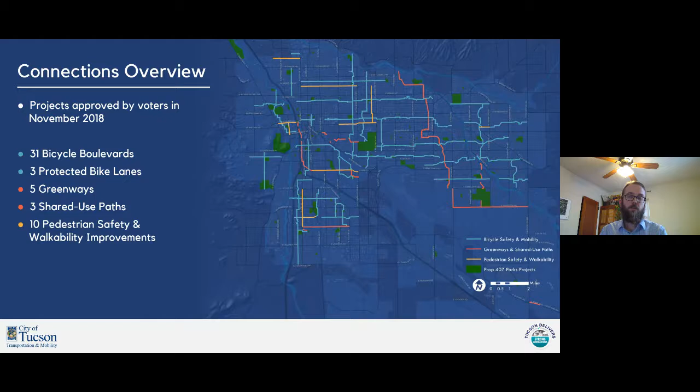Those are projects that improve residential streets for people walking and biking. And we've got them all over the city, and they cover about 102 miles. So we're really starting to fill out a network that'll allow people to ride cross town on low stress, calm, mostly residential streets.

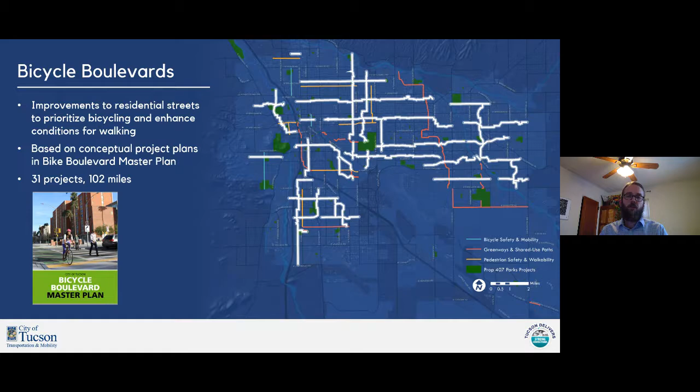So just a quick overview of bike boulevards. As I mentioned, they're typically on residential streets, though not always. They typically use traffic calming, things like traffic circles, speed humps, and chicanes to slow down cars to make for a better walking and biking environment.

And they also use enhanced crossings to help people walking and biking to get across major streets. When you've got a 4 or 6 lane road, it can be really difficult to find a break in traffic. So that's one of the big pieces of bike boulevards as well.

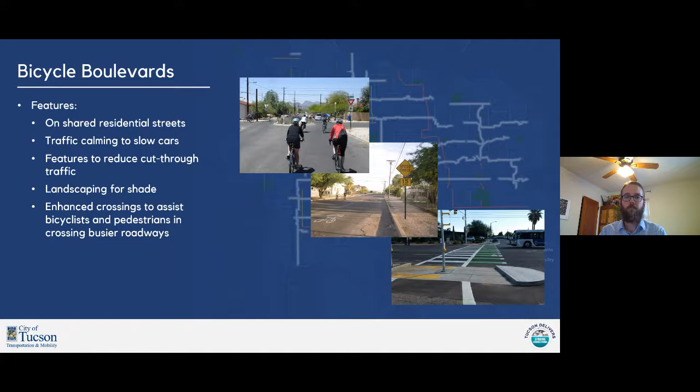So why do we build bike boulevards? Well, we've already got a lot of bike lanes in the city. I think in the region we've got close to 1,000 miles of bike lanes and other bikeways. But a lot of those are designed for what we call the strong and fearless population.

So there have been studies on the types of bicyclists that are out there, people's comfort level with riding. 1% or less are what we call strong and fearless. They're really willing to bike anywhere, any kind of facility. 7% or so are enthused and confident, and those are people who, if you give them a bike lane on a moderate street, most of them are comfortable with that. It's the 60% that are interested but concerned that we're really targeting now.

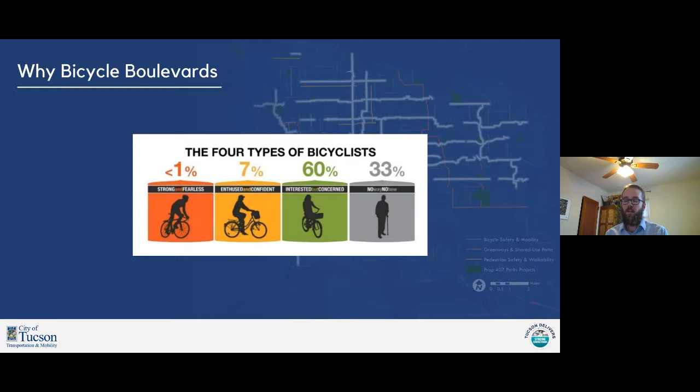What we've seen in a lot of other cities is that when you provide high quality bike facilities that are low stress, that don't put cars and bikes in competition with each other, and you give people destinations to get to, you really see a lot more people riding. So that's really who we're targeting with bike boulevards.

And we've studied some of the bike boulevards that we've already implemented, and we've seen increase in ridership. We've seen really good safety records, and we've seen traffic calming be effective in terms of slowing down cars and reducing the number of cars on those streets.

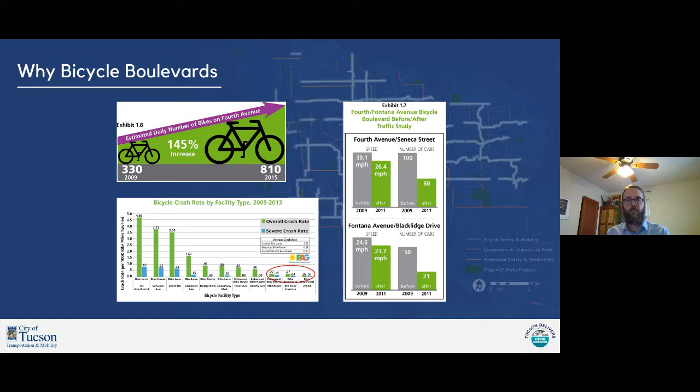So getting back to that interested but concerned population, when you're designing for interested but concerned, you need to be mindful of the roadway design, and specifically, you can't have car traffic that's too fast, and you really can't have more than 1,000 or 2,000 vehicles per day if you're going to have cars and bikes operating in the same space. That can work fine on a really low volume residential street, but when you start to see more car traffic, there really needs to be separation, and so that would take the form of a bike lane, generally either buffered or protected in some way.

So just a quick recap, we did a bunch of outreach last fall on this project, as well as the Treat Avenue Bike Boulevard. We did a total of 7 public meetings. We reached out to neighborhood associations and presented to a few of them when they requested that. Excuse me. And we spoke to and got surveys from hundreds of people at these events and online.

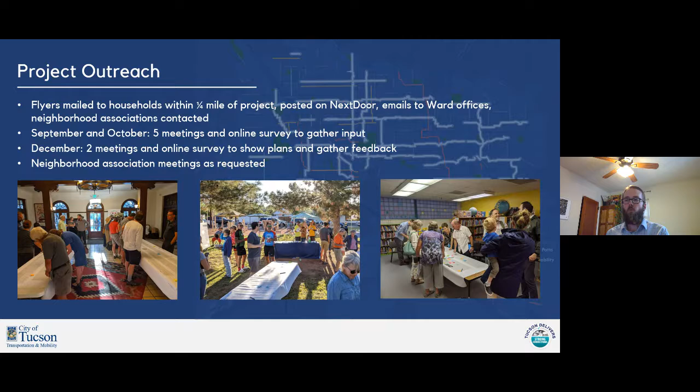And we got a lot of really good input, much of which we were able to incorporate into the designs of the projects, or that confirmed what we were planning was on target with what people wanted to see.

I apologize. So right now we see about 3,000 vehicles per day on this segment, and the 85th percentile speed that we've measured is 29 miles per hour. And all that means is that 85% of the vehicles driving down that street are going 29 miles an hour or slower, and the other 15% are going faster. And that's really just a figure that's used when analyzing the performance on roadways.

So both of those figures exceed what national bodies recommend for shared lanes. So we really want to look at other options to make these comfortable, low stress options here for people biking. So we're looking at two options really for the general roadway cross section between Stone and 4th Avenue. Right now we're looking at Stone to Herbert, because between Herbert and 4th is a little different.

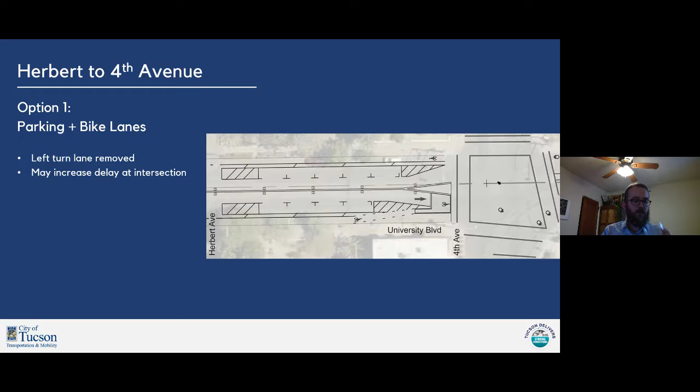Then the other decision point here is from Herbert to 4th Avenue: do we want to keep the bike lane, keep parking, and remove the left turn lane, and potentially create a little additional delay at the intersection? Or do we want to keep the left turn lane, keep the bike lanes, and remove the parking? So those are the options we're considering. Those are what we're gathering feedback on in the survey, and we definitely want to hear what people's preferences are there.

Mike asks, is there a reason why the parking lane is 9 feet in one option and 7 feet in the other? 9 feet seems really big. That's a good question. There is a reason for that, yeah. The reason is that people do use these parking lanes as parking for their house. A lot of times people don't have off-street parking. We've heard from people that when they're getting in and out of their car, when they're loading their kids in their car, they don't want cars rushing by too fast.

So we made a conscious choice for the protected bike lane option, where the parking is right next to the vehicle lane, to make that lane wider. Most cars are around 6 feet in width, so if you park all the way to the right, you've got 3 feet, which is plenty of room to get around the car and stay out of the travel lane. Whereas the other option with the buffered bike lane, we've got a 7-foot parking lane, a 3-foot buffer next to that, then the bike lane. So you've effectively got a 10-foot lane in that option. So in both cases, we're really just trying to make sure we are providing enough space for people to get in and out of their cars safely.

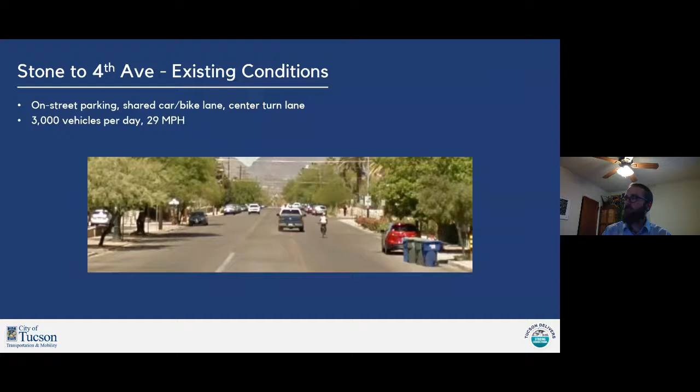But with 3,000 vehicles per day and 29 miles per hour, that's really above these types of guidelines for the types of riders that we're trying to reach. So that's why we're exploring this option for this area in particular, because it is higher vehicle volumes and higher speeds.

Our next question is, 4th Ave and University floods during almost any rain. Exit from vehicles requires getting out on the curb or walking through 8 to 12 inches of water. Will the flooding issues be addressed? Unfortunately, no. We're not doing any drainage improvements as part of this project. That's not really in the scope or the budget of this type of a project.

Which bike lane proposal is safer for cyclists? So, both options are safe. Both of them are in the realm of what is recommended for this type of facility. So I don't want to say that one is necessarily safer than another, but when you create that separate space for bicyclists, you're gonna create a higher comfort area. And certainly, if you're putting bicyclists behind parked cars, there's that physical protection there that you don't get with striped lines.

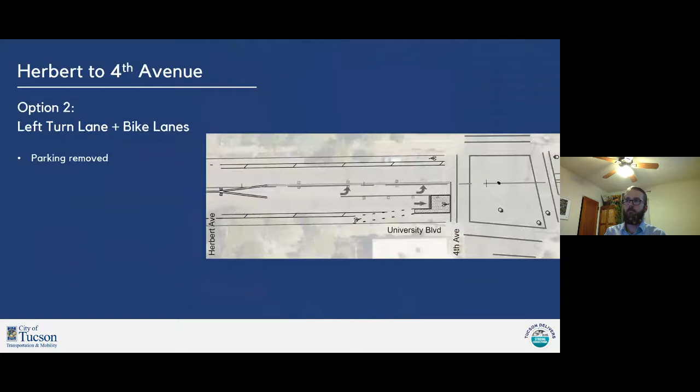Our next question is, University at 6th Ave, flexible bollards were installed to create a protected space at the intersection corners. They also enforced squared turns, which are safer, and they precluded parking too close to the corners. Within days, the flexible poles began disappearing. Who removed them were the adjacent residents who were miffed that their parking had become less convenient and less prolific. How will you deal with this going forward? I have been disappointed by the lack of enforcement regarding the destruction of roadway infrastructure, especially cycling infrastructure.

So certainly, that was a neighborhood initiated project. I'm afraid that I'm not too familiar with any agreements as far as maintenance goes there. Certainly, if we go with the protected bike lane option, we will be proactive about repairing or replacing any flexible posts that are damaged or removed. Unfortunately people are going to run into them sometimes. If you have disgruntled neighbors, that could be an issue. But we'll do our best to make sure that it's maintained, if that's the option we go with.

We have one comment from an anonymous constituent. Bikes between parked cars and curb. Really difficult to navigate intersections on a bike or make left turns. It's great downtown by the courthouse because it's basically just one block.

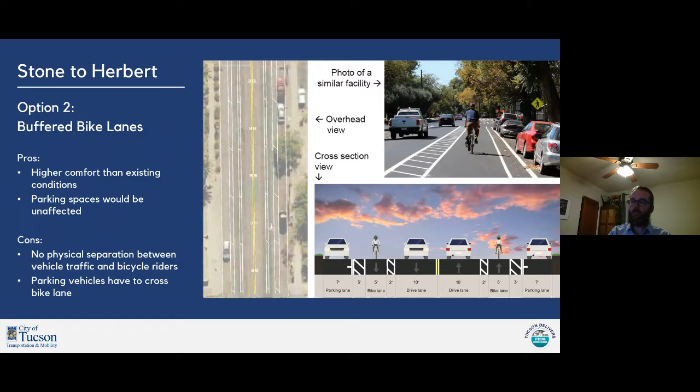We did get a question from a constituent asking, will the bike lane only exist on one side of the street, east-west direction? And Andy replied, the bike lanes would be located on both sides of the street. And then I'll pull up the visual as well, just to show. So you can see the bottom right-hand picture, that cross-section that shows the different lanes. It shows that bikes would be going the same direction as cars on the same side of the street. And that would be the case whether it's the protected bike lane option or the buffered option.

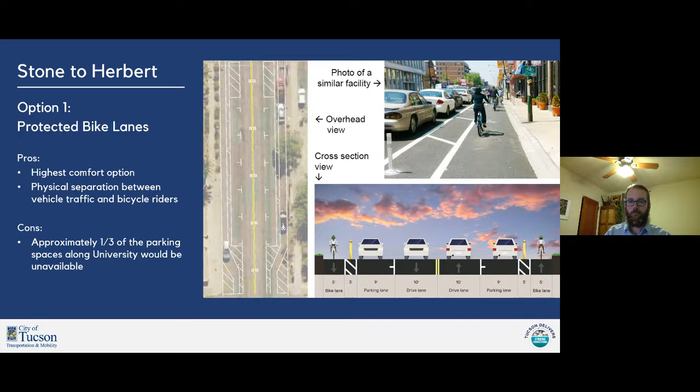We have one last comment. Lots of U-turns happen at CSA time. Yeah, I mean, there's certainly space now for a lot of cars to be able to make a U-turn, but it is not currently permitted. And if the street is reconfigured, then that's going to be more difficult, and so we would expect there'd be fewer U-turns in that case.

At this time, that is all the questions we've received. All right, I'm happy to answer any more questions people may have. If I haven't covered anything that people want to know about, happy to go over anything in the presentation.